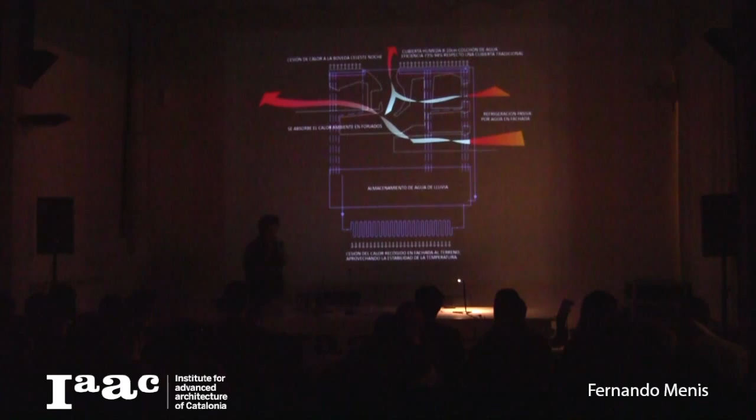On the land we put water that crosses the bamboo, there is cross ventilation, and this water, if it's not raining, we reuse again. When the water changes to vapor, we get some degrees less.

Sketches about natural ventilation, controlling the sun and shadow, very important, control the sun and shadow. This building that we can see around the world, like a bubble of glass, looking to the sun, has a lot of problems and is not a healthy building.

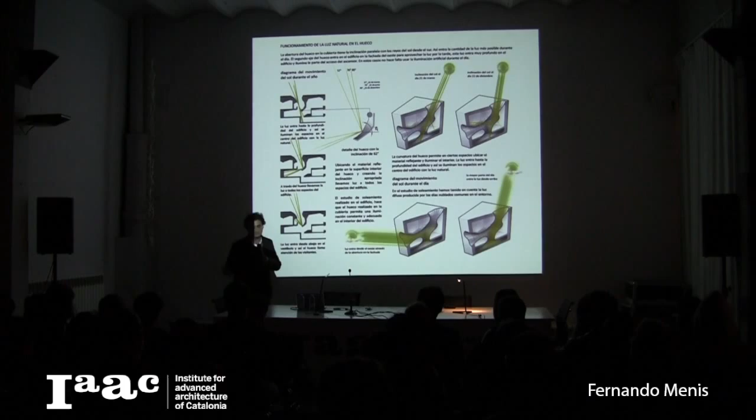This is a section, showing where the water comes down.

This is hatching, and during the last 15 years we've been investigating how can be the first moment of a city. In the past, when people wanted to create a city, they tried to find a perfect position. They'd say, oh, here I have a river, I have life, I have birds, I have animals, I have food. Okay, we are going to put the city there.

I think this is just the video of the process. This is in the Morocco pavilion in the Venice Biennale.

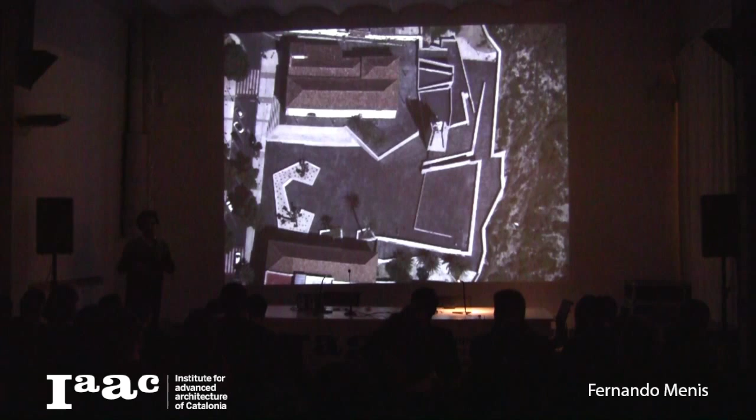This is the square before. We take away this, and this is the square now. And this is a square, and then we make this square like a multifunctional space. We try to think the square normally is multifunctional space, but we are now in Tenerife, nice weather. We don't need cover. This is fresh, and for that we create one square like a stage.

And I didn't explain, this is a museum of water. Everything is underground. It's boxes inside boxes, inside boxes, and the light comes down through the gaps. It can even rain inside the building.

Light and shadow, very important always. If you want to see light, you need shadow.

And this is the section. When you arrive at the town, you see, oh, nothing is happening, but in fact on the other side it's full of museum, rooms for the orchestra, a lot of infrastructure for the town. Even the tower, because this church didn't have a tower before, a campanile. And now you see this mountain and this tower, there is a little, I think, symmetric space.

We copied, in this case, the Taj Mahal in India. When you are at the Taj Mahal, for me the beautiful part is the square around it. When you are there, it's just like, wow, over there, no balustrade, and the section is quite close, quite similar to Taj Mahal. And we have the sensation, this is Tenerife, and you see, wow, we put a frame to the landscape.

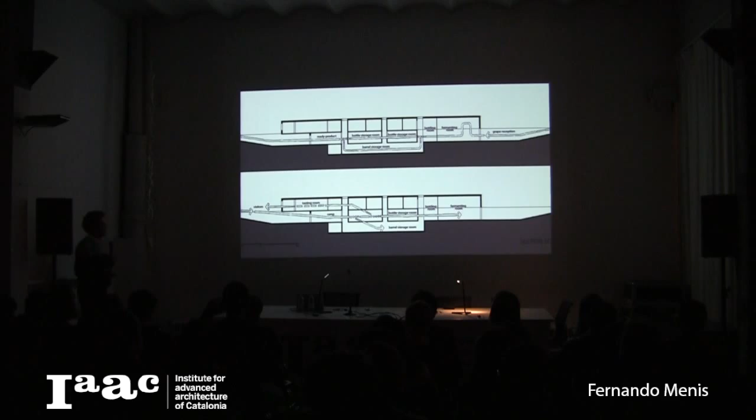But if you make this without this, it's completely wrong. You can change the factory a little, but it must be a factory, because if not, the wine is good but the process is expensive. You must create, always, reason plus emotion—sometimes with more visible force, sometimes with more invisible, depending on the project.

And this is my second university. My second university is in Tenerife. When we started to make this building, I spent about 8 years on it. And I learned and changed my mind, changed my dimension, really more than in my university. Can you imagine, 8 years on this building?

But I learned about CATIA, about double curve. This is a very old building. And really, this is my lucky break.

After that, water, liquid, and rocks. Each of the pieces has one specific function. Between these pieces, there is one square, and we cover this square.

And now we have a multifunctional space, covered, acoustic cover. It can be for orchestra, for theater, for electroacoustic, for words—a multifunctional space for 3,400 people. Acoustic diffuser in the concrete.

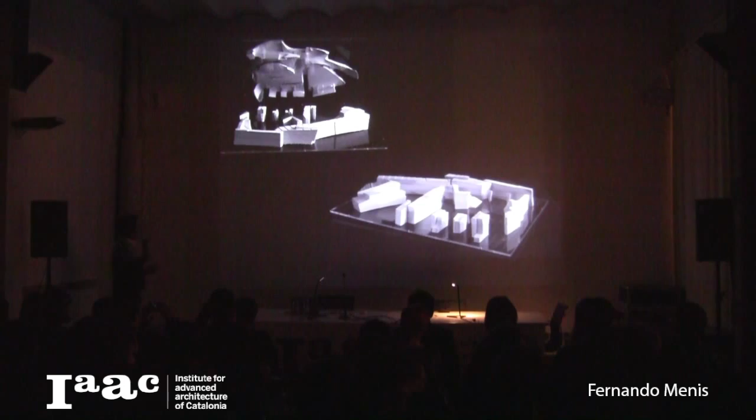This is the model we worked on for 3 years, the same model. Making—this is sand from the beach. We use sand from the beach to make the interior space.

Always people—because you see me here, but I am always with a lot of support. This is Andreas Weiner, Esther Ceballo, Carlos, Fernando Merino, the workers on the building.

My advice: when you go to make a building, say in 2 years, you must try to know the people. When they see the architect worked with me—this relation helps you, and if you listen to them, you can learn a lot of things. You can even know how the construction really is.

Patented sand pieces from the roof. 75 holes through the waterproof membranes.

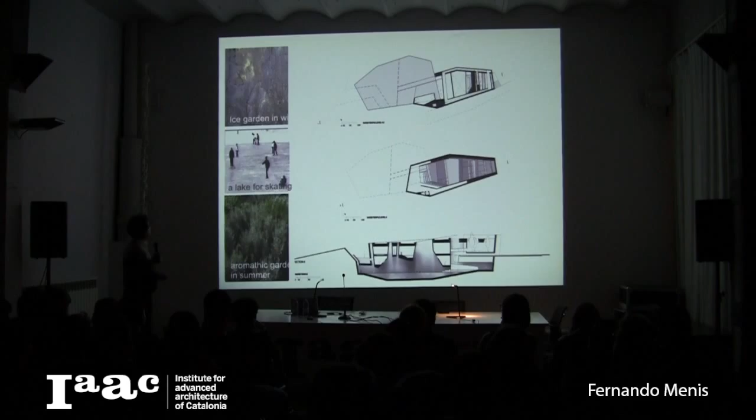Concrete ideas from the land, sections in our way about the temple of water, the ice garden, the glacier, to impregnate our project. And this is the landscape. Underneath we have 45% of the program — the small convention center, restaurant, spa — everything is invisible.

Why? Because now we are in Switzerland — what do the Swiss people want? They don't want to change the landscape too much. Even a second residence in Switzerland is now forbidden. And for that, in the competition, we took this approach.

This is the beach hall. Everything here disappears. And this is the hotel, and the hotel is this part. The project I mentioned before is just to make a hotel — maybe we are going to make the hotel. It's just about how the economy of the merchants can be better.

And for that we proposed making the town, but they said, oh, we don't have too much money for the town. Okay, we make only the small square, 200 square meters. But when we finish the square now, one bar is going to open, and other people are going to open too — this is very similar to what Bohigas did here many years ago.

Years ago, when our democracy started in Spain, Bohigas didn't have money when he was at the City Hall. And what happened? He had one idea, and he opened a small cosmetic project in the middle of the city — changed one small square, added a tree and a bench, and after that it spread like oil, impregnating the surroundings. This is what we made, copying Bohigas.

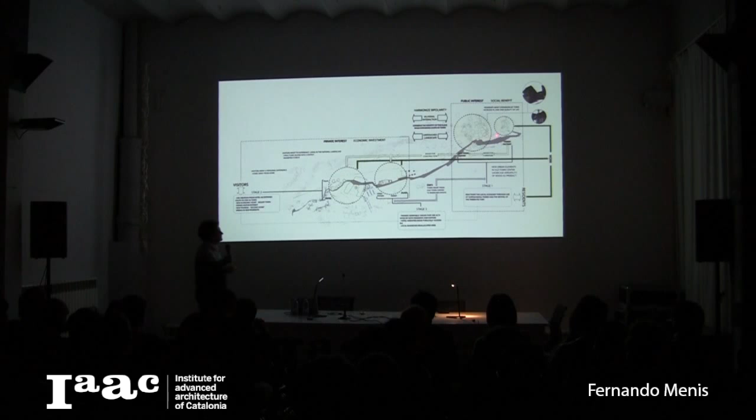We took and made the sphere first. These are the plans from the project, but we are not going to go through the whole project, just the section — this is only for one conference. This is the section of the...

This is the room, this is the concept of the hotel, inhabitant forest, and this is the square. This is the mayor of the city. But you must know, the mayor before him was an engineer, and they are very, very good friends.

This is a lesson about democracy. In our country, normally the next mayor is a strong enemy of the mayor before. But they are very close. They only want one thing: to make the town better. And this is the square, it's very small.

This is making the test with the electricity, with the main. And this is the square. When it was finished, there were only some benches and the stone pavement, nothing more.

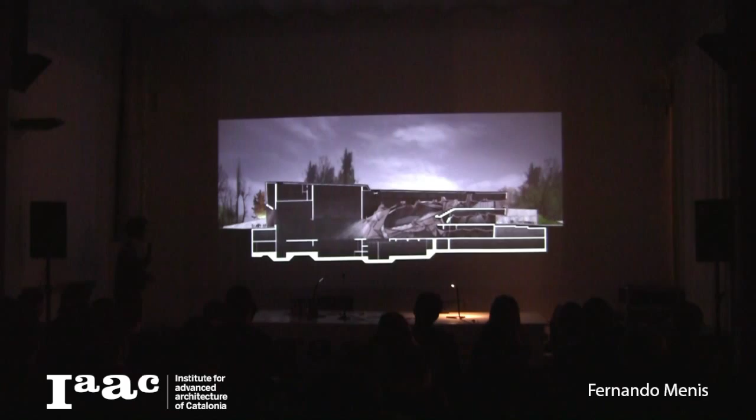This is the section, always like opera, huge relation between the machines and the... we have 4,300 drawings to define the project.

If you don't draw one screw, you must pay 10% of the cost of this screw. Be careful.

You need to control really everything. And for me, it's really better to work in this condition than in happy conditions, where nothing is fixed, where everything is moving all the time. This is really very difficult for me.

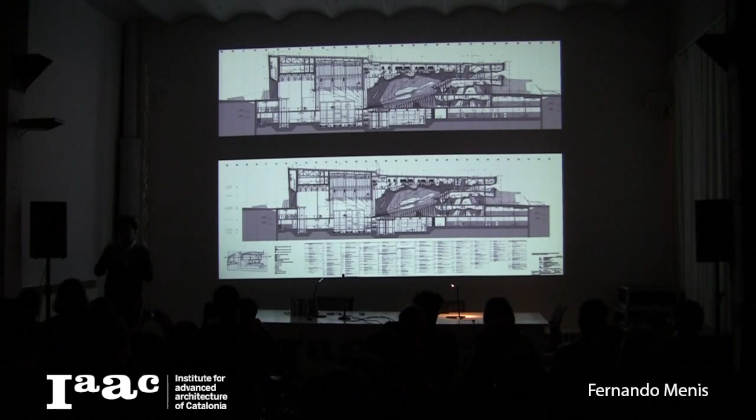There is very hard. Can you suppose that I lost this machine? I must pay 10% of the cost of the machine that I don't draw and I don't put in my project. And this is a lot of responsibility. You must know that you are making now experience, and you are in a moment that you need really learn these layers, no? But when you must finish, you must be a very good professional too.

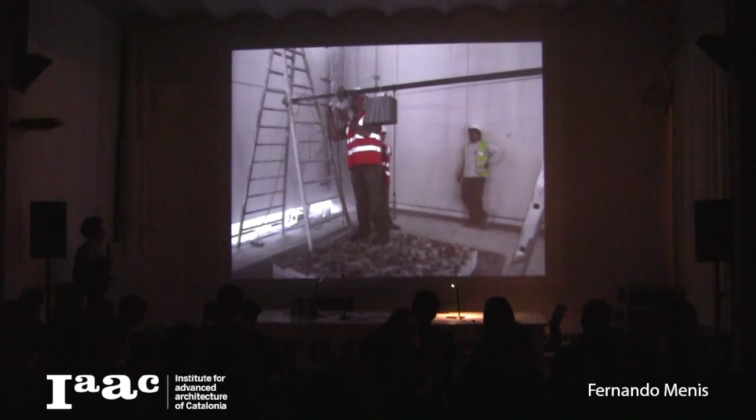Test in Valencia with Pedro Serna. Pedro Serna making the first acoustic test about how the concrete works. A lot of concrete tests. We make the homologation in Spain. After that, we make the homologation ITB in Poland.

You can make an invention, but be careful. You can't use in the European community this invention without patent, without test, without. Pedro making the first acoustic test.

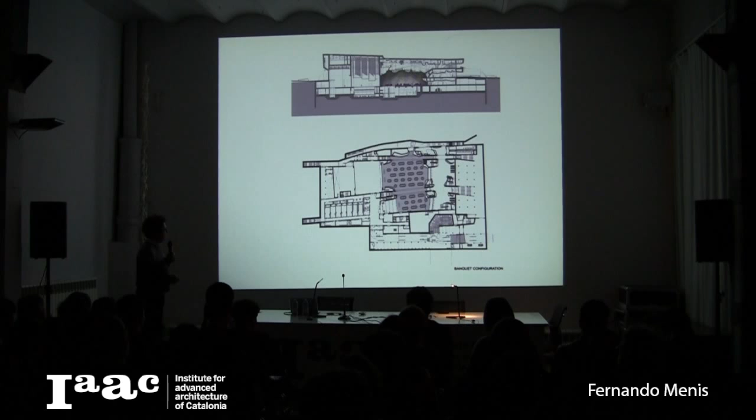And this is a multifunctional space. We have here one, here two. Now we have another configuration, more configuration, more configuration - a big dinner, for example. Another configuration, more.

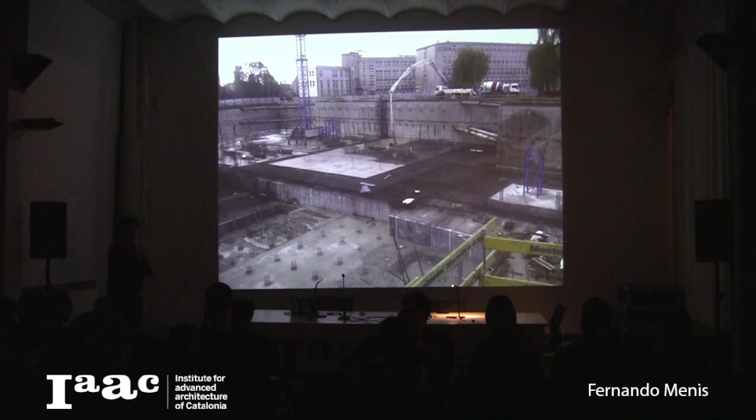And this is the site when we start to make the construction. These are the screws that fix the building 30 meters down, because the pressure of the water is 15 tons per square meter pushing up.

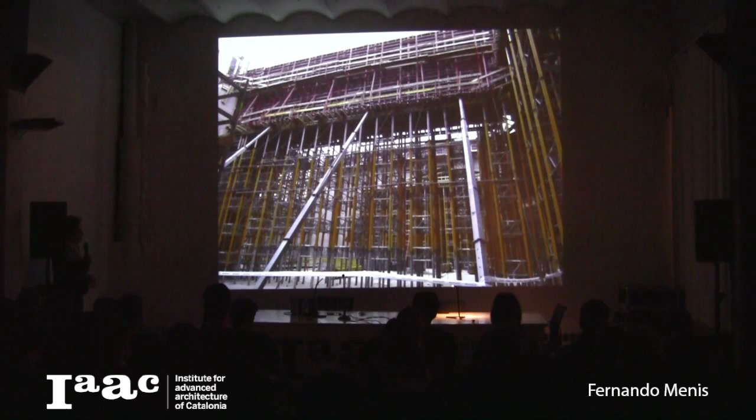I don't know what this is. Okay, doesn't matter.

Construction - you need to know the construction. If not, when you are on the building, the engineer... you lose all the battles, because the engineer really has technical knowledge, and if you want to control the building, one very important thing is technical knowledge.

Construction. Here is the sala proof. Sala proof. Acoustic diffuser that we make with Pedro, like in the magma before.

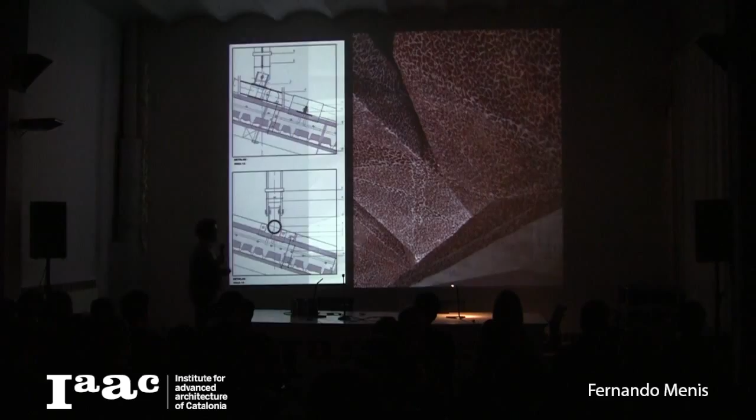This is just more details, but this building has 4,300 drawings. It's one conference for 4 hours. And this is the space inside, the space on the lobbies, the light always coming through the windows on the roof.

On the construction, sometimes you see that kind of effect for the light inside. And that's it. I hope that you find it interesting, and you must have a very good luck on the life. Thank you very much.